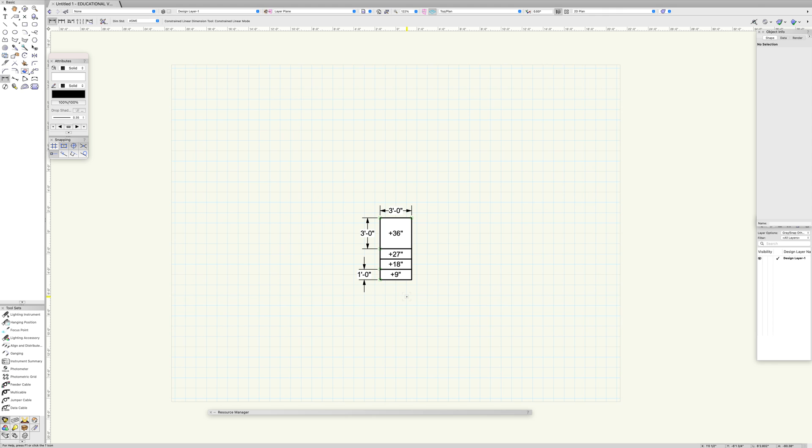Here is a staircase drawn, and this is the plan of the staircase. As you see, this staircase is 3 feet wide and 1 foot deep, which is the tread of the staircase. The first step is 9 inches high, the second step is 18 inches from the ground, the third step is 27 inches from the ground, and the platform, which is 3 feet by 3 feet, is 36 inches high from the ground. So 9-inch, 18-inch, 27-inch, and 36-inch. This platform is 3 feet wide and 3 feet deep.

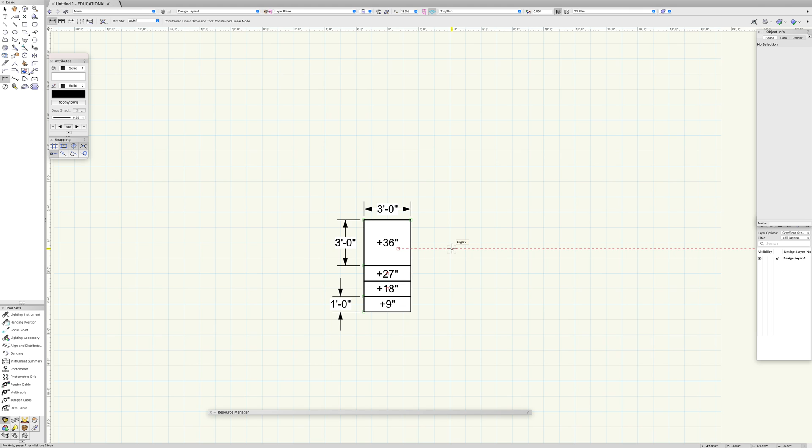So let's draw first a front elevation, which is also an orthographic projection of this drawing. I'm taking these dimensions off for a moment.

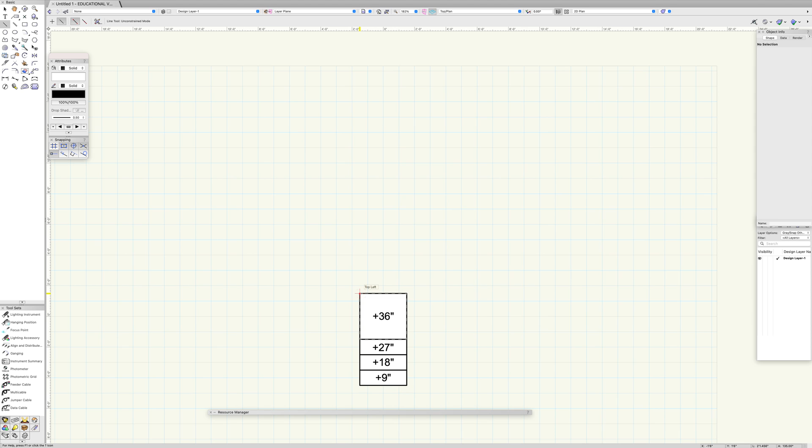In my previous video, I explained how to draw a front elevation from a ground plan. To draw a front elevation from a ground plan, draw extension lines from the corners you see. In this drawing, I see one corner and another corner - these are the only two corners I see. Now I want to start the front elevation from somewhere, so this is my baseline, the zero point for the front elevation.

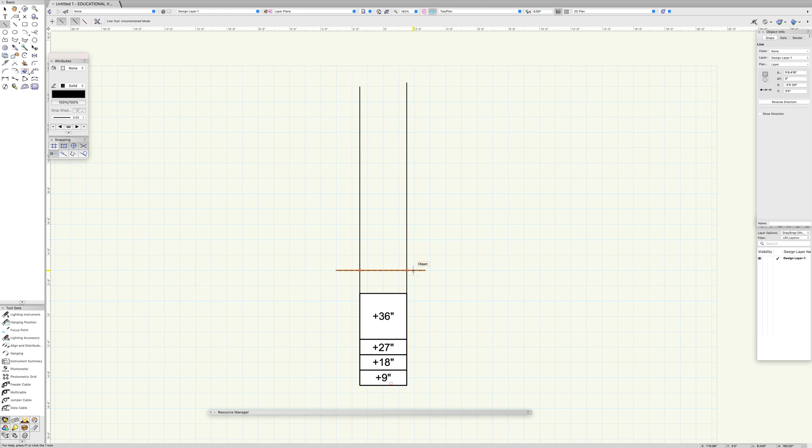Now I know that this is the width of the first step, and the first step is 9 inches high. Since I'm drawing the front elevation, it should show the width and height of the object. So the first step is 9 inches in height - I will offset this baseline by 9 inches.

To do offset, go to the offset tool and place the distance you want to offset. In this case, I want a 9-inch offset. As soon as I click, the line will be offset at 9-inch distance from the original line.

Now I know the second step is 9 inches from the first step, or 18 inches from the zero level. So if I offset this line by 9 inches, the second step line will automatically be 18 inches from the ground. You can check it from here - from here to here is 1 foot 6 inches, which is 18 inches.

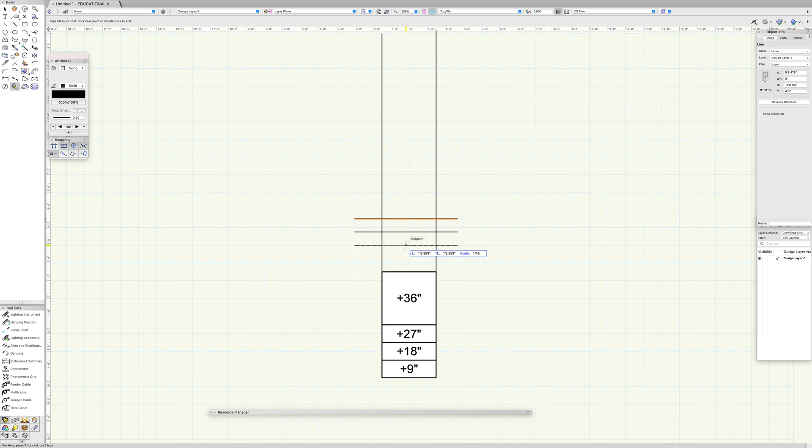Now the third step is also 9 inches from the second step, making it 27 inches from the ground. And the fourth step, which is the landing on the platform, is at 36 inches from the ground, 9 inches from the third step. So if you check from the zero level to the top level, the height should be 36 inches. If this is my baseline and I go to the top, you see this is shown as 3 feet, which is 36 inches.

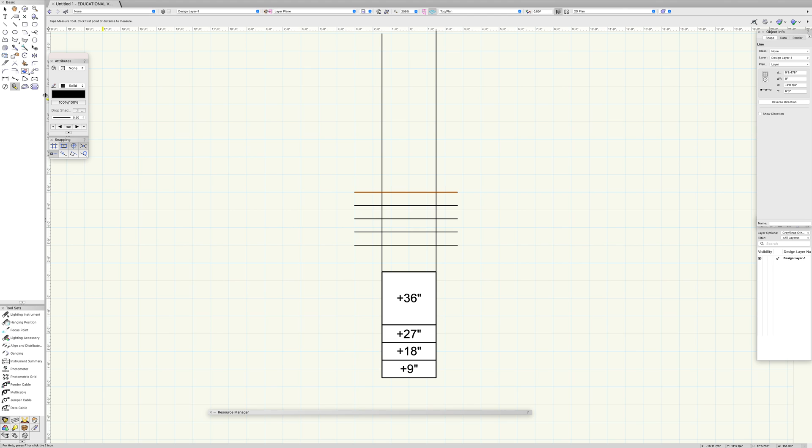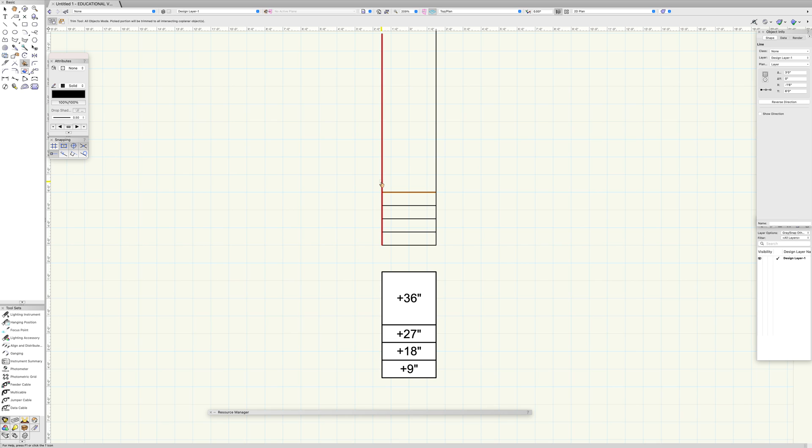I don't need these extension lines since this is my baseline where I started, so I'll cut the extension lines. I know this is the top height of the object in this staircase, so I'm taking it off from there. So this is the front elevation I will see. What you'll see is the width of the object, which is 3 feet, and the height of each step, which is 9 inches, with a total height of 36 inches shown here, which is 3 feet. So this is the front elevation, one orthographic projection.

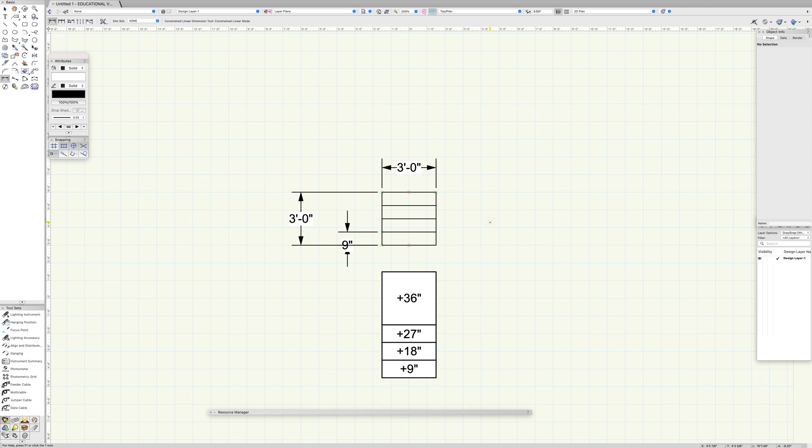Now from this orthographic projection, we can get the side elevation of this object. So let's label this as front, and this is plan or top.

Now I know the side elevation. In the side elevation, what I will see is the height of the object and one side of the object. In this case, I will see the total height of this staircase and the depth of this staircase.

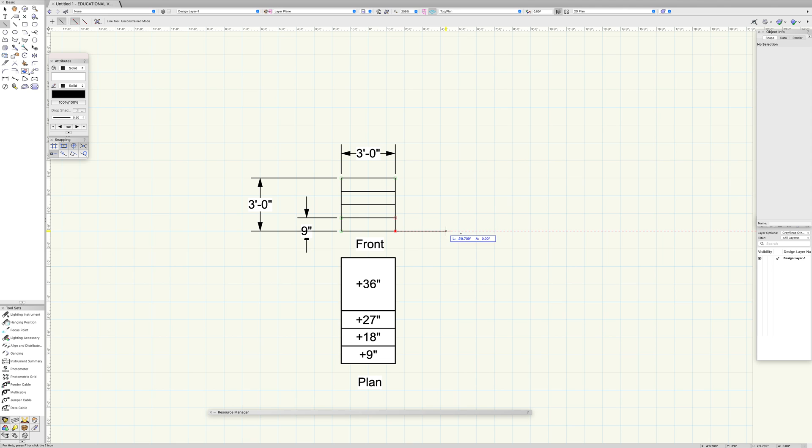Since I already have the height of this staircase, which is 36 inches from the zero level, if I draw an extension line to the side, this is the total height of the object, which is 36 inches. So if I draw from here to here, you see this is 3 feet - this is the total height.

In the side elevation also, we need a starting point, so the initial line or baseline - let's say this is our baseline. Now for the side elevation, what we want to draw is this distance, which is the tread or depth of the staircase. In this case, you know that this is 1 foot - each tread is 1 foot.

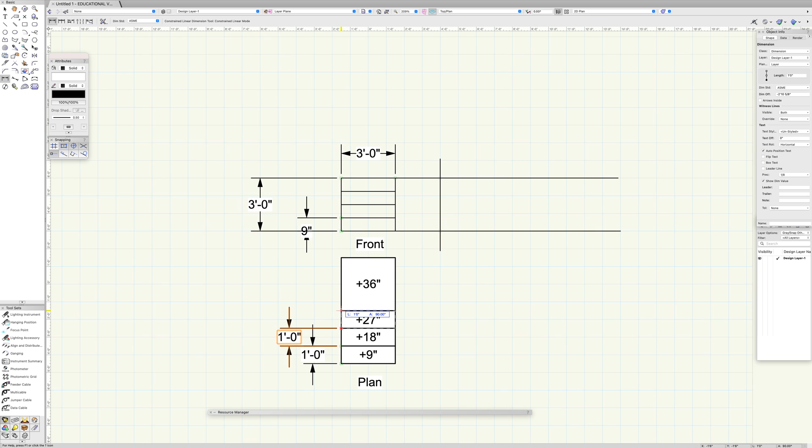And the last tread is of 3 feet, right? So to start with, the first line is this depth, which is 1 foot. So if I select this line and offset it by 1 foot, this will be my first step.

Then the next one is also 1 foot deeper than the first step, so another 1 foot. The third one is also 1 foot deeper than the second one, so that's the third one. Now the fourth stair, this platform, is the total depth from the third, which is 3 feet. So I want to go and change this distance to 3 feet.

And now I'm offsetting this line, which is the extension or representation of this line, to the 3 feet. From the front elevation, I can draw extension lines for these 3 staircases: 1, 2, 3. So if I extend my line from step 1, step 2, and step 3, this will be my sort of the basics.

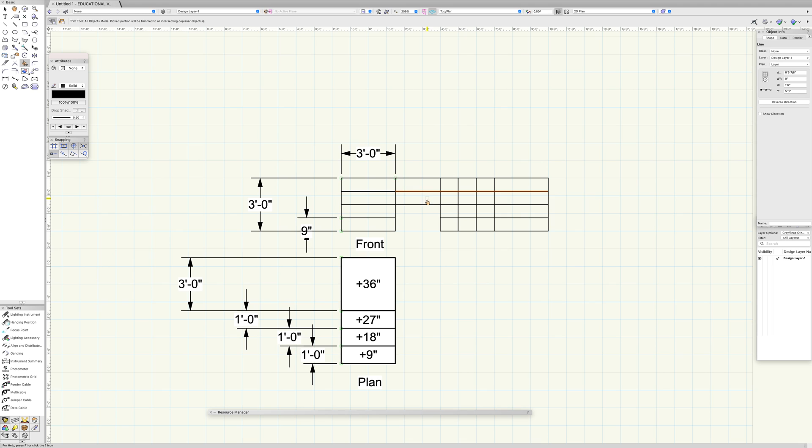So let's first get rid of these lines. And I also don't need these extensions extending from the top, so let's get rid of these. Now, if you remember, this is my baseline, so I don't need these lines which extend beyond my baseline.

Now, this is my first step, which is at 9-inch height and 1 foot deep. Just to confirm, this is 9 inches in height because this is the extension of this height which we took from the front elevation, and it's 1 foot deep. If you check it from here to here, this is 1 foot, right? So this is my first step.

I don't want this line. This is my second step, which is the extension of this line for the second step, so I don't need this line and this line. This is the extension of my third step, so I don't need this line and this line, right? And this is the extension of my top height, so I don't need this line.

So I can take this complete object out, and then because you don't see a line inside, I can also take this out, this out, this out. This is the side elevation of this object, or this another orthographic projection.

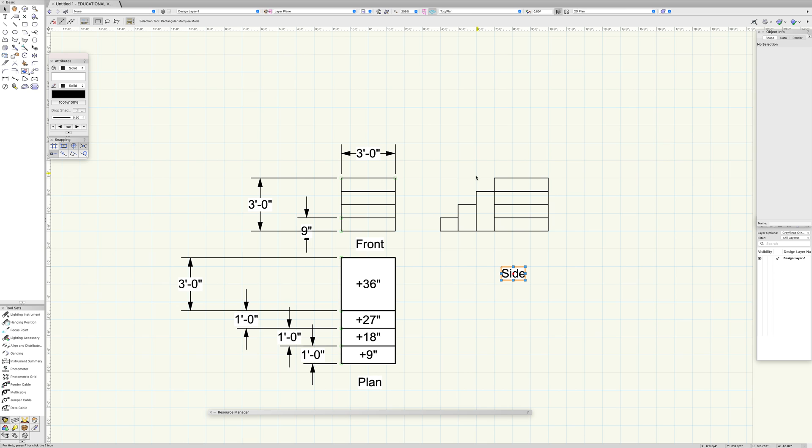So if you put dimensions for the side and for the front, you will have all three dimensions. Put dimension, let's say this should be 36 inch, which is 3 feet. Great, this should be the 3 feet by 3 feet platform, so 3 feet depth on this side. And then each one of these are 1 foot, as you see, 1 foot.

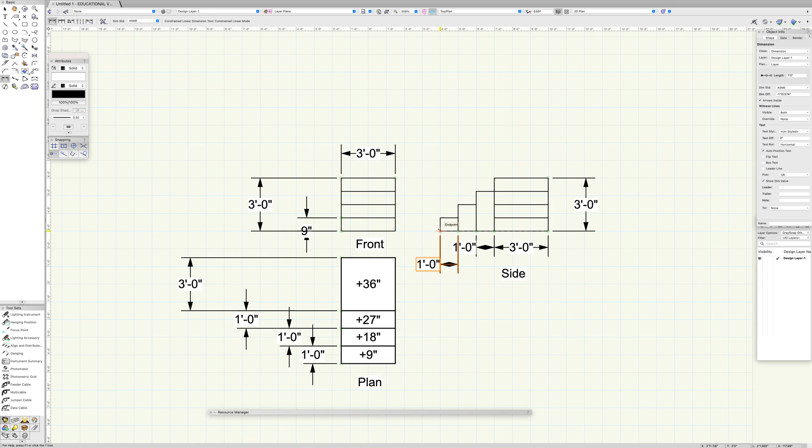And then these ones are each at 9-inch height, so 9-inch height, as you see. So this is how it will look like in terms of the side elevation. I just showed you the dimensions. I'm going to go take the dimensions out to make it a little cleaner.

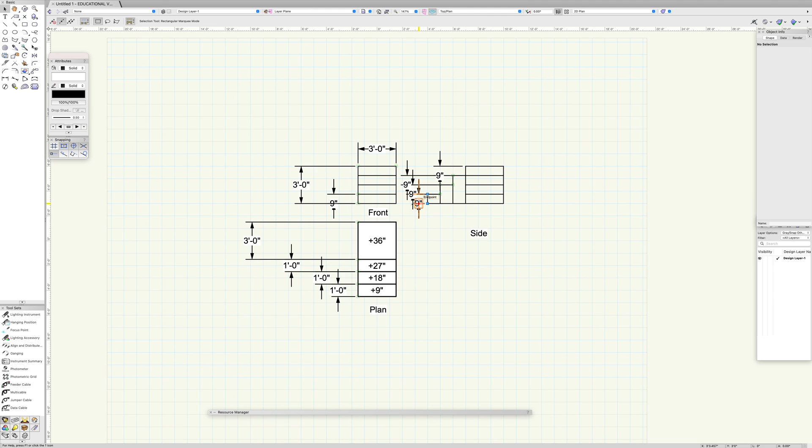So this is what the orthographic projection is. This is the front elevation of this staircase. This is the side elevation of this staircase. And this is the plan of the staircase.

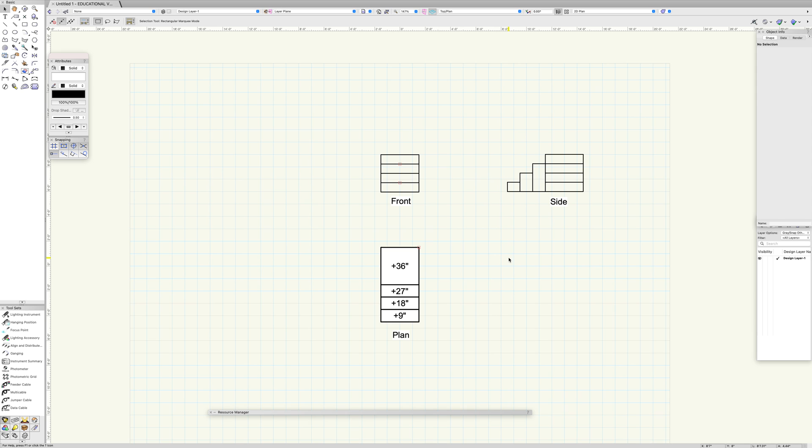Remember, from the plan, I draw the front elevation because in the plan, what I have is the width and the depth, but I don't have height. To get the height, I draw the front elevation from the plan, adding height at 9-inch increments. From the front elevation, I draw the side elevation. In the side elevation, I got this depth and also the height. So this is the orthographic projection of this one.

Three-dimensional object, which is drawn as two-dimensional. In all these drawings, what you see is two dimensions. In this one, you see the width and the height. In the side elevation, what you see is the depth and the height. In the plan, what you see is the width and the depth. So this is what it looks like.